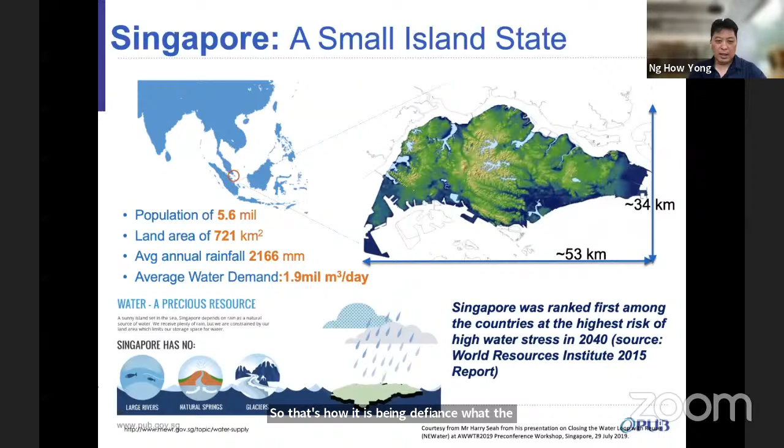So when you say water stress, what does it mean? It means a country receiving less than 1,700 cubic meters per year per person from natural rainfall or rivers. That is how water stress is defined. But nevertheless, Singapore doesn't face the issue of water scarcity.

It has been a long journey, because before Singapore could achieve a sufficient supply of drinking water, if we look at Singapore in the 1960s, we find that Singapore at that time, just before independence in 1965...

You find that the waterways in terms of Singapore River, Kallang River, it was heavily polluted with wastewater and also improper or uncontrolled discharge of sewage into streams and rivers. These rivers and streams became an open sewer system. So with that, you have very polluted water bodies, and that gave a challenge in terms of using river water as a source of drinking water.

Now, during that time, we also saw very frequent seasonal floods due to areas where, especially in the downtown area or Chinatown area, it is low-lying, and that flood occurrence intensified when the rain coincided with high tides. So seasonal flood was one of the major challenges.

Now, if you ask me, do we still face flash floods nowadays? I would say once in a while we did encounter that, and we can attribute that to blockage of waterways, which eventually can be resolved. I'll talk a bit more about how Singapore can go about solving these low-lying area flooding issues.

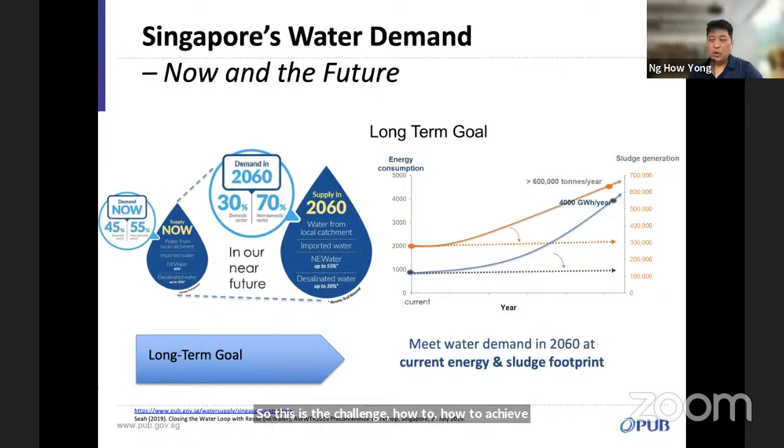However, the cost today is not low. Because if you want to produce biochar, there's an energy input required, right? And if you want to add it into concrete, there's incineration involved. The heat is required for all these treatments. So this is the challenge: how to achieve a low cost reuse of this sludge.

So if you look at Singapore's strategy, how do we achieve water sustainability or water self-sufficiency? The idea is to capture every drop of water. So currently about two-thirds of Singapore's land mass has been converted into catchment area. But of course, there's a limit to how much you can capture because of the limited land space.

Now, the other approach is to reuse water endlessly - this is talking about NEWater, all right? And then the third option is to desalinate seawater. So Singapore today has a diverse supply from 4 different sources.

Right now you can see in this diagram we have only 3 sources. The 4th source is water supply from Johor Bahru, Malaysia. Singapore has a contract with Malaysia which will expire by 2061. So by then, if the contract cannot be renewed, Singapore has to depend on these 3 strategies to achieve self-sufficiency in terms of water supply.

Now, if you ask me, can we achieve that? Certainly yes, because desalination can be done, but the only issue is that it comes at a cost. Right now, seawater desalination energy consumption is about 3 to 5 kilowatt-hours per cubic meter. This is, I would say, rather high compared to fresh water from the river or from groundwater.

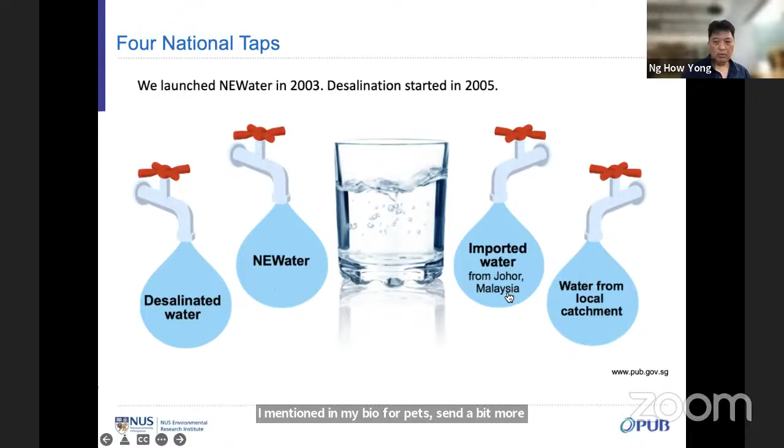So right now in Singapore, if you turn on the tap water, about 40% of the water is from recycled water. The other route is from the sea, through desalination, as a source of fresh water. Singapore has 4 taps: desalinated water, NEWater, imported water from Johor, and water from local catchment. Singapore's catchment has this type.

If you look at Singapore's central region, where the MacRitchie Reservoir area is, that's forested area. So these are the only protected catchments. The rest are considered urban catchment. Marina Reservoir is the first reservoir in the city collecting rainwater from a highly urbanized catchment.

Singapore gets substantial amounts of water from Johor, Malaysia, and there were 2 contracts. One already expired in 2011, so the second contract runs until 2061. In 2011, there was one waterworks handed over from Singapore to Malaysia.

Water reuse is a very important aspect for Singapore as an alternative source, so to do water reuse, the collection system is crucial. Singapore collects its wastewater through 2 deep tunnels. The first is DTSS, which stands for Deep Tunnel Sewerage System.

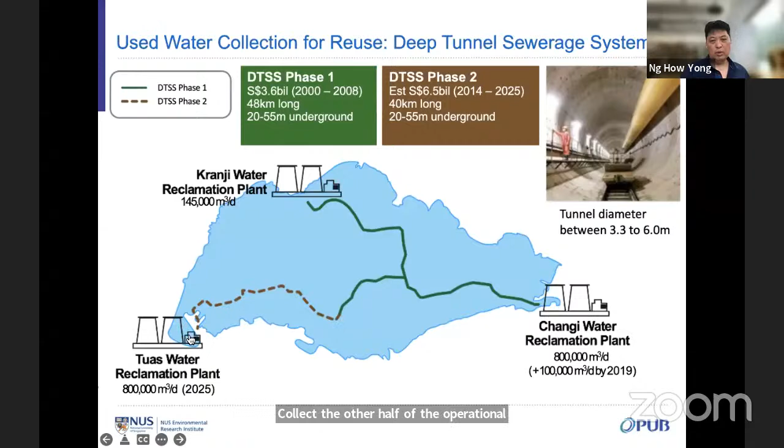After that, normally most plants use the activated sludge process, comprising the aeration tank plus secondary clarification. Right now in Singapore, progressively most plants have been converted to membrane bioreactor. Basically, membrane bioreactor comprises an aeration tank and a membrane, either ultrafiltration or microfiltration, to replace the secondary clarifier for solid and water separation. In the next part of the lecture, I will go through the details—what it is about, and the advantages plus disadvantages.

Singapore's Deep Tunnel Sewerage System, DTSS, was a vision conceived in the 1990s. It was designed to provide a cost-effective and sustainable solution to support Singapore's long-term needs for used water collection, treatment, reclamation, and disposal.

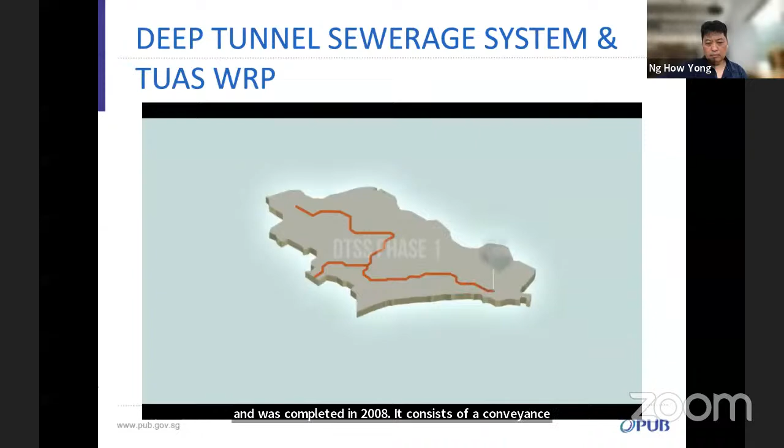DTSS Phase 1 serves the eastern part of Singapore and was completed in 2008. It consists of a conveyance system made up of deep tunnels and link sewers, the Changi Water Reclamation Plant, and its outfall. Phase 2 will extend this deep tunnel system to the southern and western parts of Singapore.

It will have a conveyance system made up of link sewers and deep tunnels comprising a south tunnel and an industrial tunnel, as well as the Tuas Water Reclamation Plant, known as Tuas WRP. By interlinking with Phase 1, DTSS Phase 2 will complete the used water system to serve Singapore for the long term. Kranji WRP remains to the north as part of the 3-node used water system.

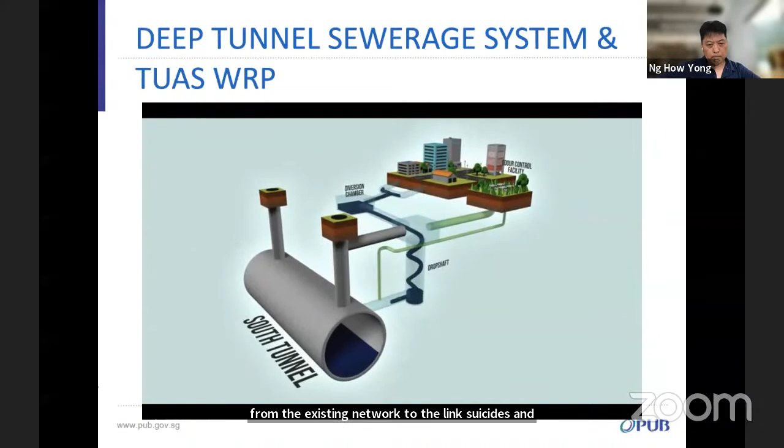How does the process work? Used water will be channeled from the existing network to the link sewers and into the south tunnel via drop shafts. The used water then flows by gravity along the south tunnel, which runs underneath major roads. It is then conveyed to Tuas WRP for treatment.

There, advanced treatment technologies will purify it into NEWater and industrial-grade water for reuse. The integrated NEWater production facility at the Tuas WRP will boost NEWater supply. Any excess treated effluent will be discharged into the sea in an environmentally responsible manner.

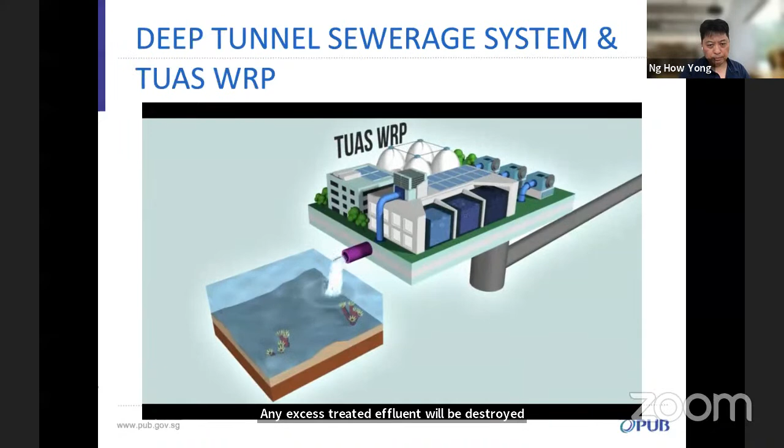The South Tunnel serves as a cost-effective superhighway. Built at a gentle gradient, used water is transported entirely by the force of gravity before being pumped up at Tuas WRP.

This removes the need for multiple intermediate pumping stations, eliminating the risk of used water overflows. Previously occupied land can then be freed up for higher value developments.

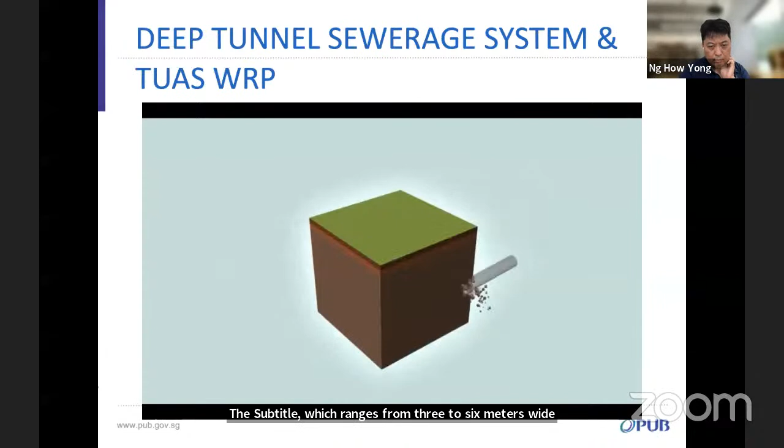The South Tunnel, which ranges from 3 to 6 meters wide, will mainly run along the Ayer Rajah Expressway. Constructed with tunnel boring machines, the South Tunnel lies deeper than some of the underground subway lines and even crosses beneath the seabed at Tuas Bay before reaching Tuas WRP.

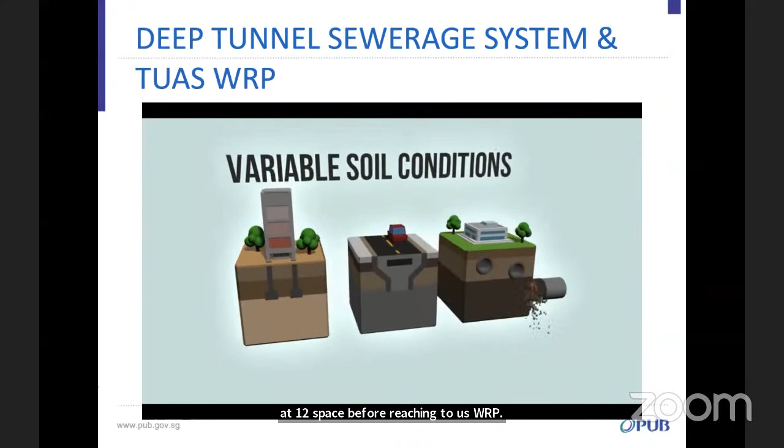One construction challenge lies with the variable soil conditions and existing facilities. The conveyance system will cross under existing tunnels and pass through sedimentary rock with weathered water course channels and soil containing sand pockets. Construction will be carried out with minimal impact. The Phase 2 conveyance system will also feature a complementary secondary liner with HDPE lining to protect against corrosion.

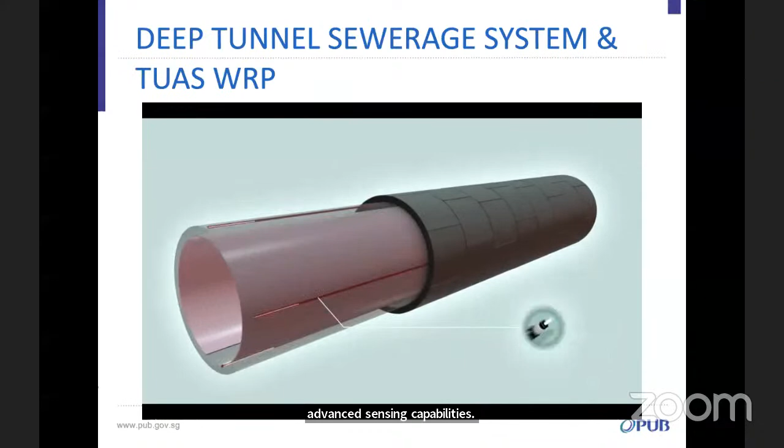One of the key features of the South Tunnel is its advanced sensing capabilities. Embedded on the primary lining, fiber optic wires are installed along the entire length of the tunnel. This monitoring system checks the structural integrity of the tunnel without the need for physical inspection. The fiber optic wires also allow engineers to pinpoint the section that requires isolation for human access in the event of repairs and emergencies. Used water will then flow through the tunnel uninterrupted via an alternative path.

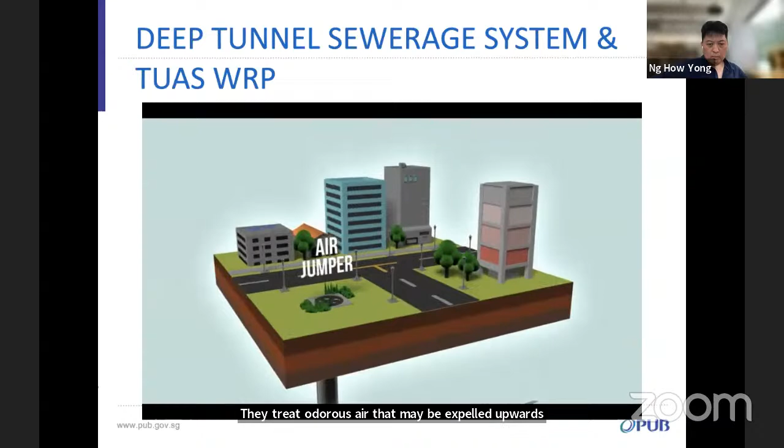The conveyance system also features air jumpers and odor control facilities located strategically at shafts along the South Tunnel. They treat odorous air that may be expelled upwards. Air jumpers act as forced ventilation, designed to push odorous air back down into the tunnel to be treated by downstream odor control facilities.

When the Tuas WRP is operational, existing Ulu Pandan and Jurong WRPs will be phased out, freeing up land for higher value development. In addition, advanced technologies at the Tuas WRP will improve its energy efficiency and reduce cost and manpower.

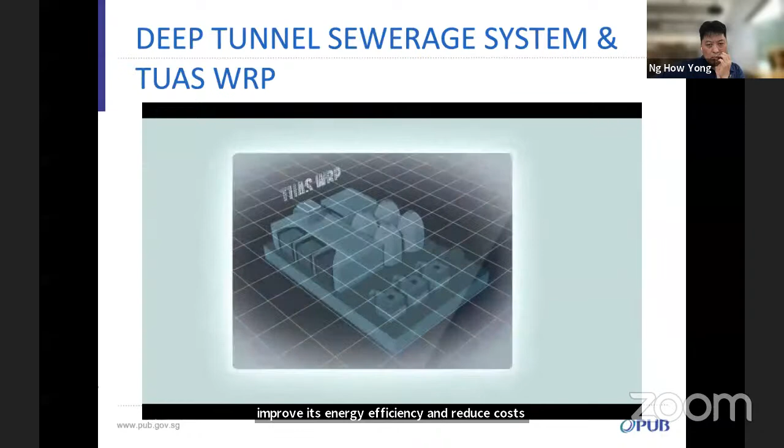The Tuas WRP design promotes energy efficiency. By building upwards, it has a more compact land footprint as compared to conventional WRPs and allows for natural ventilation and lighting, as well as easier access for maintenance.

One advanced technology is the membrane bioreactor process, which replaces the conventional bioreactor, secondary sedimentation, and microfiltration and ultrafiltration stages, thus streamlining the used water treatment and new water processes into one.

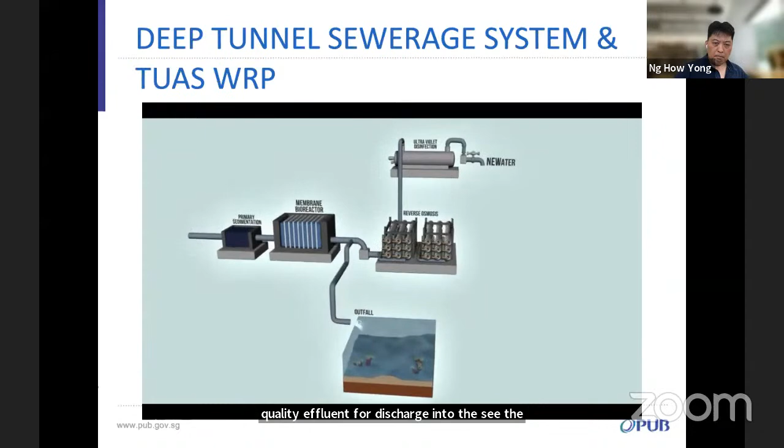This provides space savings while generating a higher quality effluent for discharge into the sea. The plant will be the largest membrane bioreactor facility in the world, treating 800,000 cubic meters of used water per day. Another technology implemented at Tuas WRP is the thermal hydrolysis process, which will reduce the space required for biosolids treatment and increase biogas and energy yields.

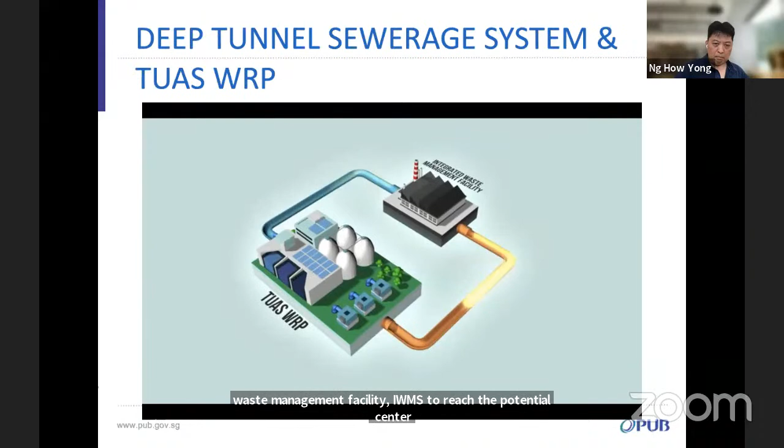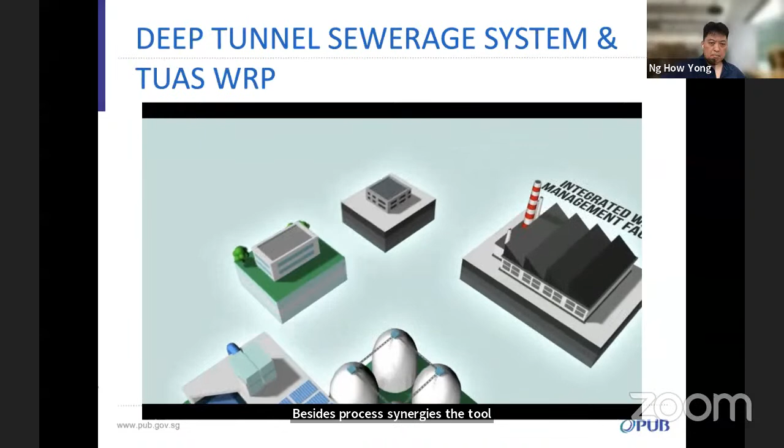Tuas WRP will be co-located with the National Environment Agency's Integrated Waste Management Facility, IWMF, to reap the potential synergies of the water-energy-waste nexus, maximizing energy and resource recovery. For example, food waste received at IWMF will be pre-sorted and digested with sludge using Tuas WRP's digesters, producing biogas. The resulting biogas and sludge are fed back as a fuel source to IWMF for incineration. Electricity generated at IWMF is then supplied to Tuas WRP for its operations. Besides process synergies, the two will share common facilities like the admin building and car park to further optimize land use. The co-located facility is compact, resource efficient, and the first of its kind in the world, planned from the ground up.

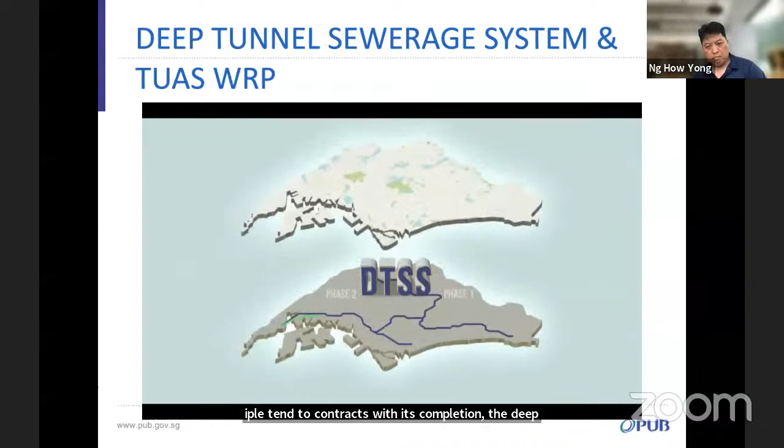DTSS Phase 2 is envisioned to be sustainable, resilient, and cost-efficient. To be ready by 2025, it will be completed in stages through multiple tender contracts. With its completion, the deep tunnel sewerage system will play an integral role in Singapore's diversified water portfolio, creating a sustainable used water management system for our country's future.

Okay, so just now the video introduced you to DTSS Phase 2 and also the upcoming Tuas Water Reclamation Plant co-located with the Integrated Waste Management Facility, IWMF. So coming to NEWater, as I mentioned earlier, after the used water is treated, it goes through microfiltration or ultrafiltration before going through the reverse osmosis process, followed by ultraviolet disinfection to produce this high-grade reclaimed water.

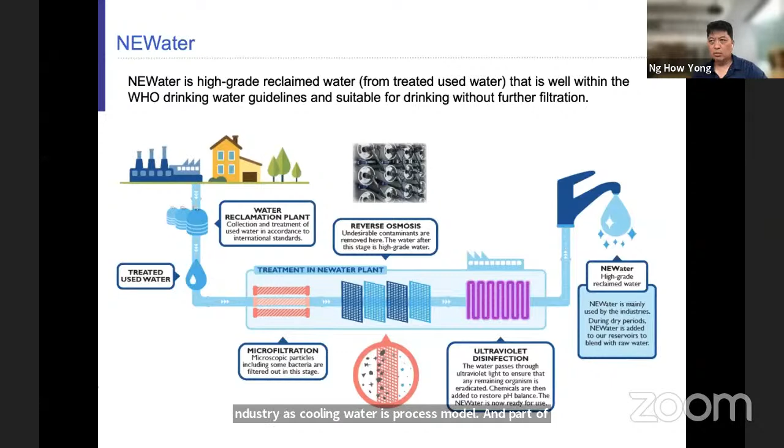So in Singapore this is known as NEWater, which is high-grade reclaimed water. As mentioned earlier, NEWater is primarily used by industry as cooling water and process water, and part of it is added to Singapore's 17 reservoirs to blend with the raw water as a source of drinking water. This is called direct non-potable, indirect potable use. So NEWater plants right now in Singapore include Kranji, Bedok, Changi, and Ulu Pandan, and in the future there will be the Tuas NEWater plant as well.

Now, one of the key questions that a lot of people ask is: is this NEWater safe for drinking? Because you look at NEWater, it's recycled water from wastewater that goes through microfiltration, ultrafiltration, reverse osmosis, and then ultraviolet disinfection. So the challenge here is whether it's safe for drinking.

So the key is learning from what other countries have done. Singapore has done demonstration plant studies, we have a very comprehensive sampling and monitoring program, and in earlier studies we also had health effect studies. If you look at recycled water and what other countries have done, the first country that implemented water reuse quite extensively was the US, in Southern California, in the LA and San Diego area.

At that time, there was this called Water Factory 21. Basically they went through the same process, but the water was used to recharge the groundwater, supplementing it, and at the same time creating a seawater barrier. You must make sure the groundwater is at an ample supply, otherwise seawater intrusion will occur, and your groundwater will become salty or brackish, because if your water uptake from the ground is too high relative to freshwater supplementation, you get seawater intrusion.

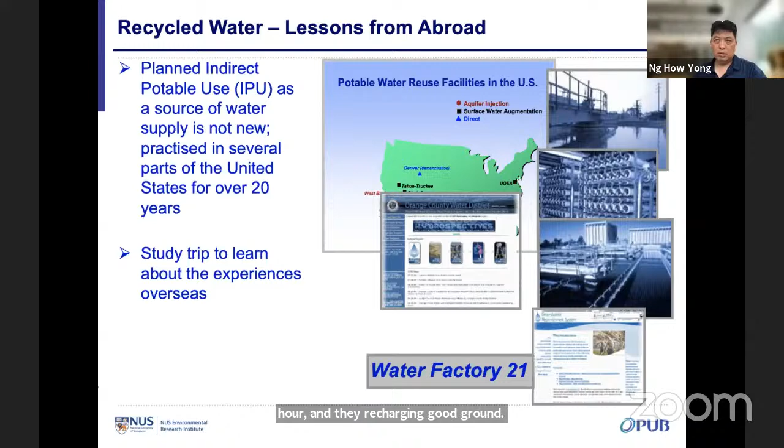So in the early days, the 1970s, there was this Water Factory 21. They went through the same reverse osmosis process, produced this high-quality water, and recharged it into the ground as a groundwater supplement. So that has been done a long time ago, and certainly it has been proven to be working.

And then in Singapore, before we started NEWater in the early 2000s, there was an extensive study, including a demonstration plant, to first produce enough water for laboratory-scale study on the health impact, and at the same time to gain operational experience. That NEWater demonstration plant ran from 2000 to 2013, with a capacity of about 10,000 cubic meters per day, which is quite sizable.

So we'll test for reliability and robustness, and gain experience through the demo, so that you can incorporate problems encountered into the design of the full-scale plant, and help address concerns like damage to the membrane by hypochlorite, for example.

In terms of sampling and monitoring, until today the Public Utilities Board conducted regular extensive monitoring, including 293 water quality parameters, more than 100 specified by US EPA and 122 by WHO. During this study, we conducted the most comprehensive water quality study of reclaimed water, covering classical water quality parameters, and additionally looking at synthetic and natural hormones, which we call emerging contaminants, or EDC, endocrine disrupting compounds. This was studied extensively, along with microbiological water quality parameters.

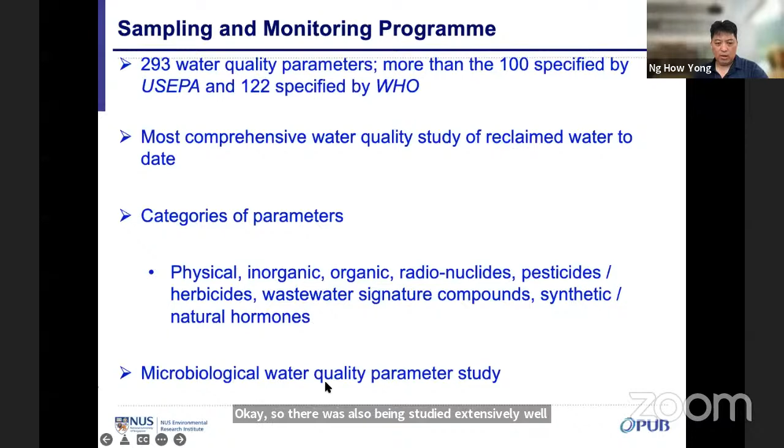So these are all the various categories of test parameters, and eventually there are 293. You can see the emerging contaminants category alone considers 49 parameters. So in total, 293 parameters are monitored consistently, including during the studies.

Of course, there are important practices like good laboratory practices, quality assurance, and quality control, to make sure you have updated, effective, and ethical protocols, and good quality accurate data for analysis, training, and troubleshooting. To date, more than 170,000 tests have been conducted on samples from treated used water and NEWater, which consistently meets the latest requirements of US EPA's National Primary and Secondary Drinking Water Standards and the WHO Drinking Water Quality Guidelines.

I mentioned earlier that in the early 2000s there was a 5-year study looking at health impact. In this study, mice and fish were studied for short-term and long-term health effects, looking at long-term toxicity and carcinogenicity. Based on that study, it was proven that NEWater indeed was very safe as a source of drinking water.

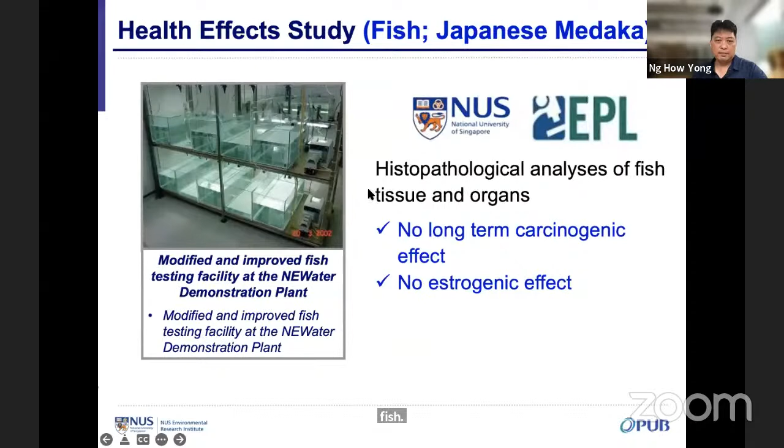So I mentioned desalination is another important source of drinking water. Right now Singapore has 5 desalination plants: SingSpring desal plant at 30 million gallons of water per day, then the Tuaspring plant, and a third one, the Tuas desal plant, also 30 million, which was completed end of 2017.

Now I want to highlight this 4th plant, the Marina East plant. It's located right beside Marina Bay. This plant is very interesting in the sense that it was designed to treat 2 types of water - one is regular seawater.

Now, just like I mentioned, how do you ensure the fresh water from Marina Bay is safe for drinking? To achieve that, the Marina Bay water is actually treated by the Marina East desal plant. So this desal plant serves either taking seawater for treatment, or fresh water from Marina Bay, which goes through the reverse osmosis process to produce high quality RO water. So this is the treatment protocol to ensure that this Marina Bay water is safe - basically, it's RO treated water.

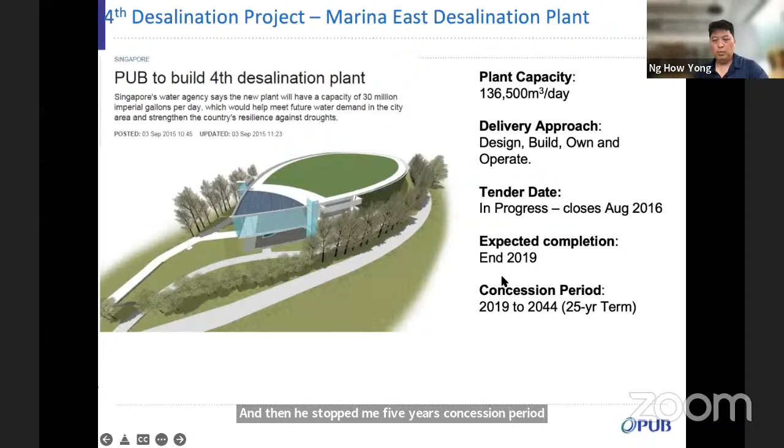So they run the plant and sell the water to PUB. In terms of ensuring water sustainability, we need to ensure there's sufficient water supply, so I would call that the hardware. But eventually you still need the human aspect of it too, conservation and valuing water, enjoying water, is a very important part of the whole equation.

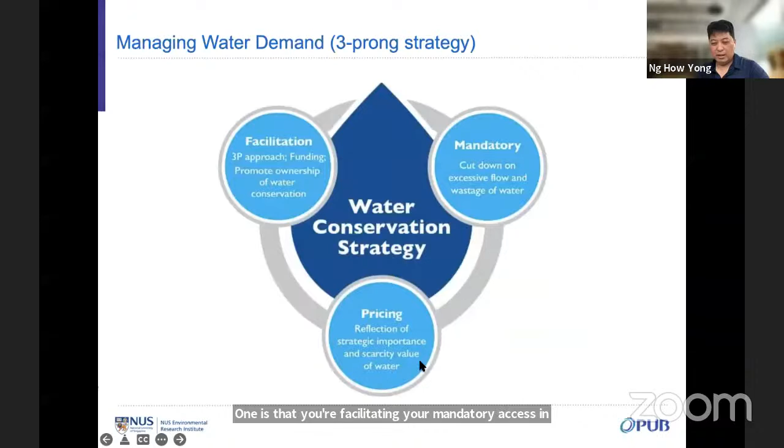So you need the people of Singapore to cherish water so that they don't waste it. To achieve that, you need the 3-prong strategy. One is you facilitate, making it mandatory to cut down excessive flow and wastage of water. And a certain important aspect is the pricing.

In terms of mandatory requirements, there's a standard for how much water a tap or washing machine can use, and there's this water efficiency labeling scheme. All electronic utensils, taps, sinks, or shower heads related to water have this water efficiency label. A 4-tick rating is the most efficient. This gives the consumer a choice.

Usually consumers want something that will save their water bill. So basically there are 17 reservoirs in Singapore, and there's this Active, Beautiful, Clean Waters program to convert all these concrete canals into beautiful waterways, so that people appreciate and enjoy the nice environment.

Now, in terms of consumption, as I mentioned earlier, Singapore is trying to reduce and encourage water consumption reduction. In 2017, it was 143 liters per person per day of water consumption, and right now it's hovering around these numbers.

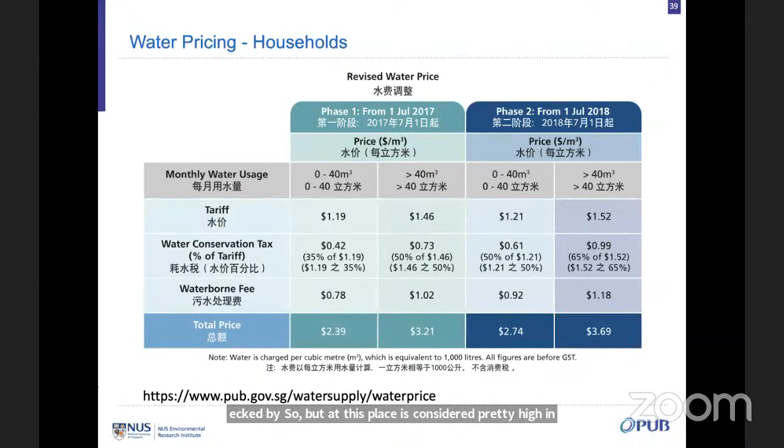So is this considered high? I would say it is high in Asia. Of course, for Europe and the US I haven't checked the price, but this price is considered pretty high in Asia, certainly. By having such a high cost, it hurts the pocket if you waste water, so for Singaporeans, including myself, we are very careful.

Like sometimes you forget to turn off the tap, kids forget to turn it off, and when the kid gets older they'll get a big scolding because more money is going down the drain. So water pricing is a very important aspect, but of course it's also a very sensitive topic politically.

If you look at other countries, including Taiwan, the water price is very cheap, about $1 Singapore per cubic meter. That is very low. When you talk to friends in Taiwan, they say politicians refuse to increase water price because if you raise it, people get unhappy and you'll lose the election. So politicians are reluctant to increase water price.

So the water treatment plant faces a big challenge because the price is so low, and they have to find very cost-effective means of water treatment.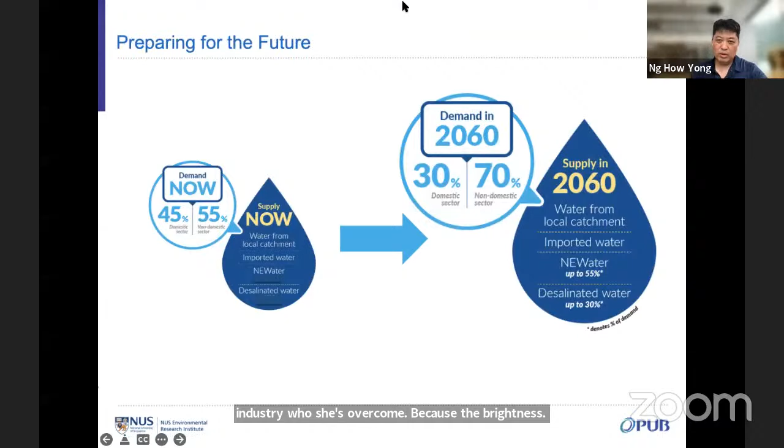Now there's this thing called industrial water in Singapore. What is industrial water? It's basically MBR permeate water, at a lower cost of $1.58. Industrial water is used by certain industries, like shipyards, when they wash a ship hull or the body, they don't need very pure tap water, so they can switch to industrial water for cleaning purposes.

So in Singapore, there are three types of water: tap water, NEWater, and industrial water.

Moving forward to the future, Singapore has to increase its water supply by at least one time of today. So how do we achieve that? Of course, building more desal plants is the future, but at the same time, you need to reduce production costs, improve quality and security. So what are the solutions?

R&D looks at biomimetic desalination, low energy desalination, cryptosporidium detection to safeguard drinking water, and fish monitoring systems to make sure the water is safe. So I think for those of us who are very familiar with water treatment...

If you go to a water treatment plant, at the last part of the treatment, before the water goes out to your water storage, there's always a fish tank with fish swimming. You'll be wondering what this fish is for. They use the fish as an indicator of problems with the produced drinking water. If there's a toxic compound inside, the fish will die. So if you see fish dying, you know the water has a problem - you're using fish to monitor drinking water safety.

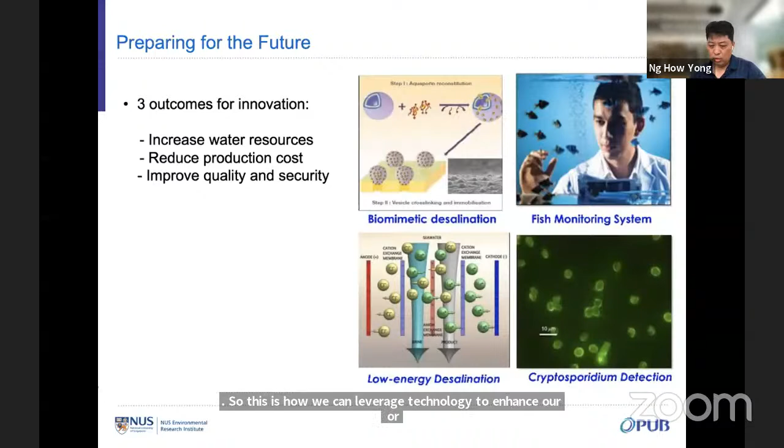Remember that in Singapore, our wastewater is our source of NEWater. So how do we ensure there's no toxic compound or illegal discharge into the wastewater? There's this environment sense startup company that developed an electrochemical sensor, a bioelectrochemical sensor, that detects wastewater effluent discharge to check for toxic compounds. If a toxic compound is detected, it triggers the auto sampler to collect the sample, which can then be taken for ICP analysis for heavy metals to confirm and check what compound is found in the illegal or accidental discharge.

This system was implemented in Singapore about two years ago. Right now there are 175 units installed around Singapore, mainly detecting trade effluent from factories that use heavy metals like electroplating. Over two years, they've captured about 30-plus samples of discharge exceeding the limit, and those were subjected to legal prosecution. So this is another way you leverage technology to safeguard your source of drinking water.

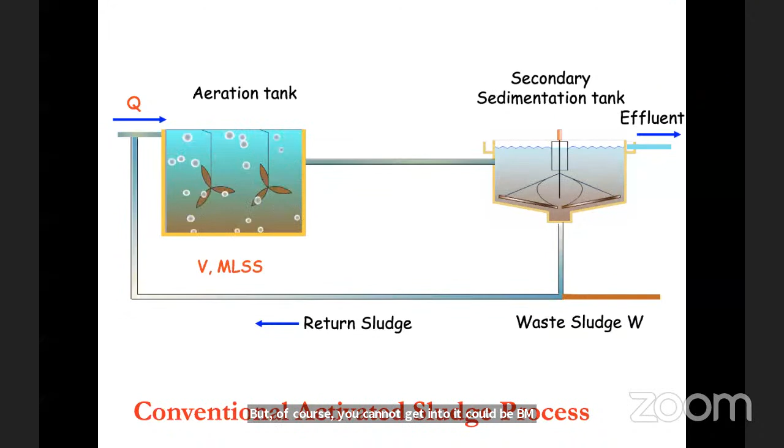With that, you go through a secondary sedimentation tank where you achieve solid-liquid separation by gravity, producing an effluent that is low in suspended solids or bacteria. But of course you cannot get zero—you still get a few ppm, at least, of TSS, and those are usually bacteria. After sedimentation, you recycle the bacteria back to the aeration tank. Then, because of the excess growth or net growth of bacteria, you take out the excess sludge as waste sludge. So this is the conventional activated sludge process.

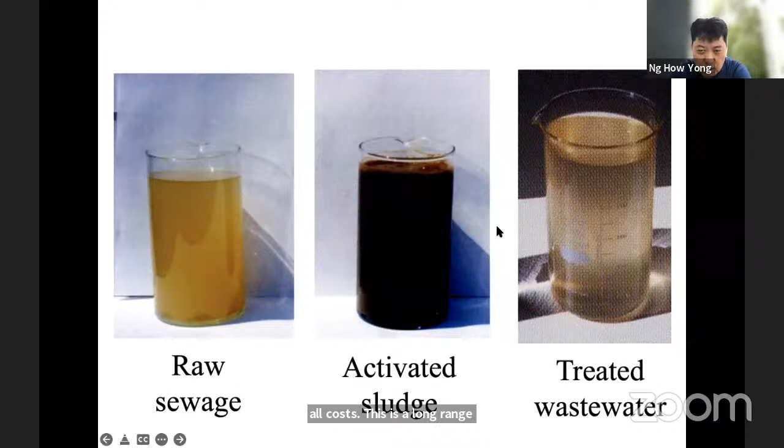Now this is a picture of a typical activated sludge process. You can see this aerator, which has a propeller splashing the water as a means of transferring oxygen into the wastewater. This is the aerator for aeration, and then you have the secondary clarifier, which is typical of the conventional activated sludge process. This is a picture showing raw sewage, activated sludge, and then treated wastewater—the typical activated sludge process.

Now, is there anything wrong with the activated sludge process? I would say there is nothing wrong. But if we compare it, what are the major challenges of the activated sludge process? First is a large footprint. I'm not saying that activated sludge process is the only way to have a good treatment process.

Of course, if you talk about rural areas, you've got oxidation ponds, you've got wetlands. There are different types of systems suitable for different types of communities and wastewater flows. But if you talk about activated sludge process, especially in a very organized, big city where there is a huge volume of wastewater, you don't have a lot of land—you can't afford to have oxidation ponds, for example in Jakarta, that would be too challenging. In big cities where population intensity is very high, we need a high rate, high efficiency, low footprint wastewater treatment system. Classically, that's the activated sludge process.

When you compare activated sludge process to, let's say, membrane bioreactor, activated sludge process will require a larger footprint. But of course, an oxidation pond would be even larger. A 2 or 3 stage process is very typical—even MBR still needs a 2 or 3 stage process depending on treatment objectives. But one of the key challenges is the settling problem of activated sludge.

We hear about this thing called bulking and foaming. That is when you have filamentous bacteria overgrow, and then these bacteria cannot settle. Normally, an activated sludge failure is when these bacteria fail to settle in the secondary sedimentation tank. Then you have all this waste bacteria lost in the effluent, and you cannot have sufficient bacteria or microorganisms to cycle back to the aeration tank. Then your system will slowly fail because you're losing your bacteria. So having a very well settled bacteria or biological floc

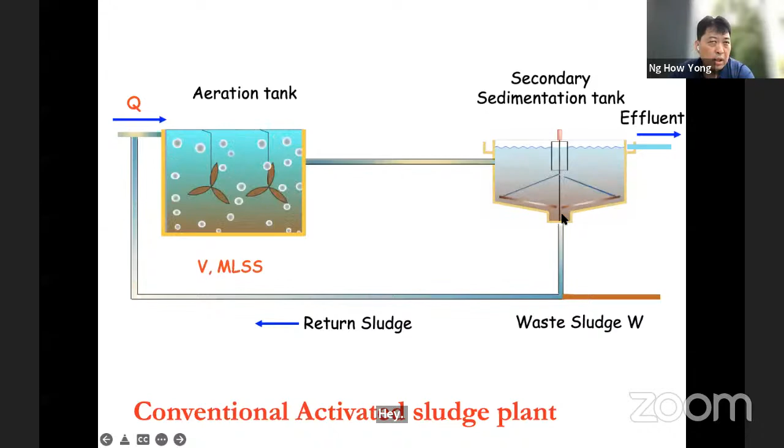biomass is very crucial to the successful operation of the activated sludge process. So when you have a bulking or foaming issue, that is a sign of trouble for your treatment, the activated sludge process. So for aeration, certainly you need an efficient aeration system with fine bubbles to have a high oxygen transfer efficiency.

Then you can have high dissolved oxygen in order to reduce energy cost, obviously, right? Normally the activated sludge process may need further polishing, such as disinfection or even filtration. It all depends on your target usage. But most wastewater treatment plants at least need disinfection before you discharge to the receiving water body. Then you may have a relatively dilute sludge generated. That's talking about activated sludge process.

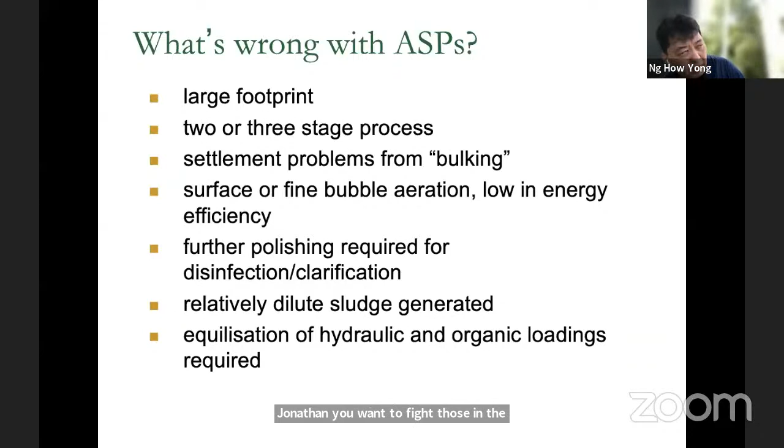If you study activated sludge process, typical biomass concentration or MLSS is about 3,000 plus, maximum 5,000. Seldom do you go above 5,000, right? More than 5,000 means your oxygen transfer, sludge settling may be a problem. So normally activated sludge process will maintain the MLSS concentration less than 5,000, right?

So in a sense it is diluted compared to MBR, because MBR can go up to 13 grams per liter of biomass concentration - 13,000 milligrams per liter of MLSS.

Equalization of hydraulic and organic loading is required - it depends. If it's industrial, then certainly you need that. Otherwise, for domestic, normally you don't need equalization. This is the conventional activated sludge process, right? You have a bioreactor, you have a settler, and you have a recycling stream, that's the sludge.

Of course, key control parameters include F to M ratio, food to microorganism ratio. There's always a range that you should maintain, otherwise you may have food starvation or overloading. If your F to M ratio is too low, you may have sludge bulking issues. And then, of course, you can compute your sludge age.

Typically for conventional activated sludge, your maximum sludge age is like what - 10 days, 12 days is considered pretty high. That's typical. But for MBR, you can go up to 15, 20 days of sludge age.

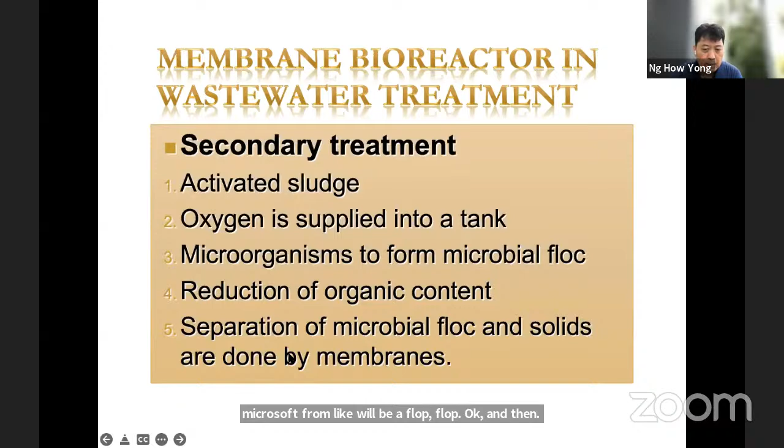Now, if you ask me, what is the MBR characteristic? So basically, we replace the secondary clarifier by MF or UF to achieve more reliable solid-water separation than activated sludge. Because if you have an activated sludge process, usually the discharge quality is controlled by SS, BOD, or COD. Now if your settler doesn't work well, you get more solids coming out. When you do a BOD or COD test, the value will be higher because your biomass contributes to organics, and then you may exceed your discharge standards. So settling is very crucial.

Now, if you have a membrane to replace the settler, the membrane, no matter how it runs, will retain all your bacteria. So you will only produce a permeate or effluent that is suspended solids free. You only have dissolved organics. So you will be able to ensure a reliable water quality that always meets the discharge standard, unless your bacteria died or your bacteria is not working. So you can produce an effluent of much higher quality than the conventional activated sludge process.

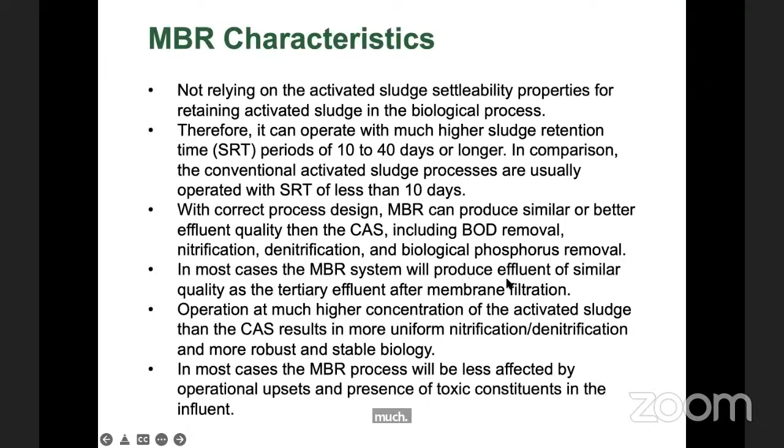With correct process design, MBR can produce similar or better effluent quality than activated sludge, including BOD removal, nitrification, denitrification, and biological phosphorus removal. In most cases, the MBR system will produce effluent similar in quality to tertiary effluent after membrane filtration. Operation at much higher concentration of activated sludge than conventional activated sludge process results in more uniform denitrification and more robust, stable biology. In most cases, MBR process will be less affected by operational upsets and presence of toxic constituents in the influent, because you have such high biomass concentration in the aeration tank.

So if you compare the quality: conventional activated sludge BOD is 5 to 7 milligrams per liter, MBR typically less than 0.4. TSS less than 0.4, while activated sludge is 2 to 5. Ammonia less than 0.5, total nitrogen less than 5, TP less than 0.2. So MBR normally will produce much better effluent quality compared to the activated sludge process.

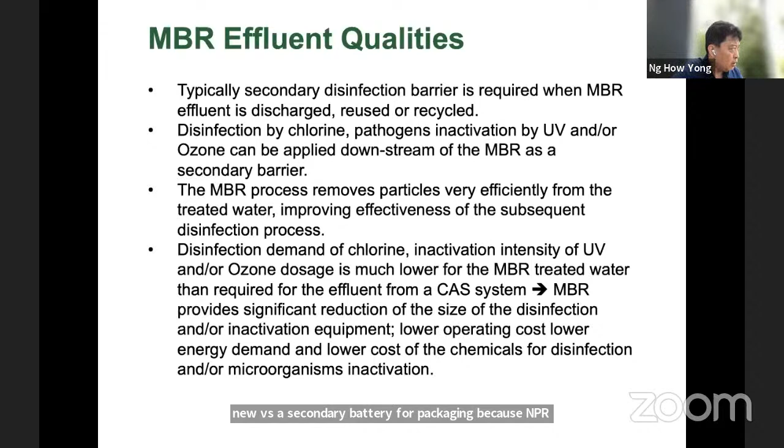Typically, a secondary disinfection barrier is required when MBR effluent is reused or recycled. You can disinfect by chlorine, UV or ozone as a secondary barrier for pathogens, because MBR can remove particles, but it cannot guarantee absolute virus removal. So you still need a secondary barrier by disinfection. Also, you cannot guarantee you don't have a broken fiber in the MBR through long-term operation, so it is always advisable to have a secondary barrier of disinfection.

MBR process removes particles very efficiently from treated water, improving the effectiveness of the subsequent disinfection process. If you have UV and you've got solids, it's not as effective compared to having totally suspended-solids-free water, because in ultraviolet disinfection, if you've got particles, you've got viruses hiding behind the particles. If they're not subjected to UV irradiation, then the efficiency of disinfection will drop.

Disinfection demand of chlorine, and inactivation intensity of UV and ozone, is much lower for MBR-treated water than required for effluent from the activated sludge system. This means MBR can provide significant reduction in the size of disinfection or inactivation equipment, lower OPEX costs due to lower energy demand, and lower cost of chemicals for disinfection or microorganism inactivation.

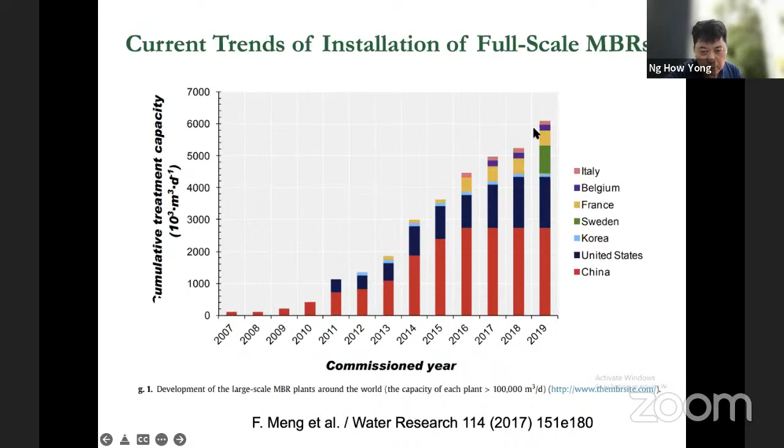There are basically two configurations of MBR. One is the side-stream MBR, where you have your aeration tank, then use a pump to pump through a membrane module, and your recycled sludge goes back to the bioreactor. Under this kind of system, it's a pressurized system—you apply pressure to push the water through either the MF or UF membrane to produce permeate. So this is a pressurized system for side-stream MBR.

The other commonly used system is the submerged system. Basically, you submerge your membrane into the bioreactor, and then provide a suction pressure to suck out the water through the membrane. Just imagine you're having a straw—when you use a straw, you need to provide suction. You use a suction force to suck out the water, so this is very similar to that concept.

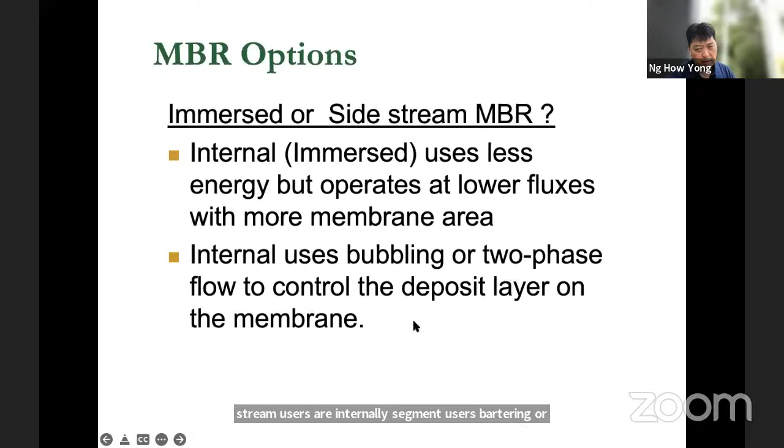You also have bubbles scouring the surface to produce intense recirculation and delay flow. That's how the system works - you submerge the membrane, there's an air jet at the bottom, bubbles rise, providing scouring effect to the membrane surface. So the question is, immersed or side stream MBR, which is better? Based on many reports, submerged or immersed systems use less energy but operate at lower flux with more membrane surface area. So there's always pros and cons - internal uses bubbling or two-phase flow to control the deposit layer.

This is an example comparing external membrane and immersed systems in terms of surface area and flux. Typically MBR maximum sustainable operation flux is 25, although some report 20 to 50, but in reality 25 is the maximum for sustainable operation - normal operation at 25 LMH. But side stream can go higher, with pressure at 400 kPa. For immersed systems, it's negative pressure, 20 to 50 kPa.

Cross flow velocity is 3 to 5 for side stream systems, but immersed systems don't require that. Instead, immersed systems need an airflow rate of about 40 cubic meters per hour for a ZW 500 module. Energy consumption is 4 to 12 kilowatt hours per cubic meter of product water for side stream, versus 0.3 to 0.6 kilowatt hours per cubic meter for submerged. So energy-wise, it's much lower for the submerged system.

Now, advantages of external membrane modules: aerating the tank floats oil and grease, it's easier to clean the membrane chemically without upsetting the biological process, and there's ability to control the environment around the membrane module better. Flexible operation, delta P may be changed to accommodate the inflow rate. So this is for external membrane modules, especially the last two points. For the third point, cleaning the membrane chemically without upsetting the biological process, that is true if you have a single tank system.

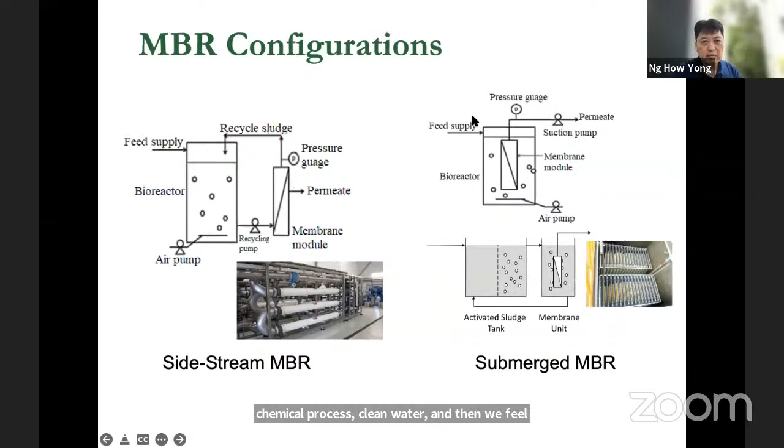So there's always pros and cons to those systems. Now, advantages of submerged membrane: less pumping cost and lower energy cost. Membrane installed in the existing tank, you can always put it into the activated sludge tank. So for submerged membrane systems, you can retrofit from the activated sludge process, just shut off the secondary clarification and convert some of the final tank into a membrane tank. Larger modules can be designed for larger flow to be treated, so depending on the flow rate, you can design the membrane module.

In terms of submerged membrane companies, there are many companies out in the market. The more well-established ones include Zenon, US Memcor - this is the earlier name, now it's called DuPont Evoqua, that is the Memcor we're referring to - and then you have the Japanese company Mitsubishi. These are all hollow fiber, like spaghetti type. And then you've got flat plate vertical like Kubota and Toray, these are flat plate and frame systems.

So this is like hollow fiber - what are all these things? This is the hollow fiber membrane. Basically if you look at this fiber, it's just like a straw, there's a hollow tube inside. But the wall of your straw is polymer with micropores, 0.45 or 0.04 micrometer pore size holes, that allow water to permeate through. At the bottom there's a holder, on the top there's a holder, and then you provide suction, and it will produce the permeate.

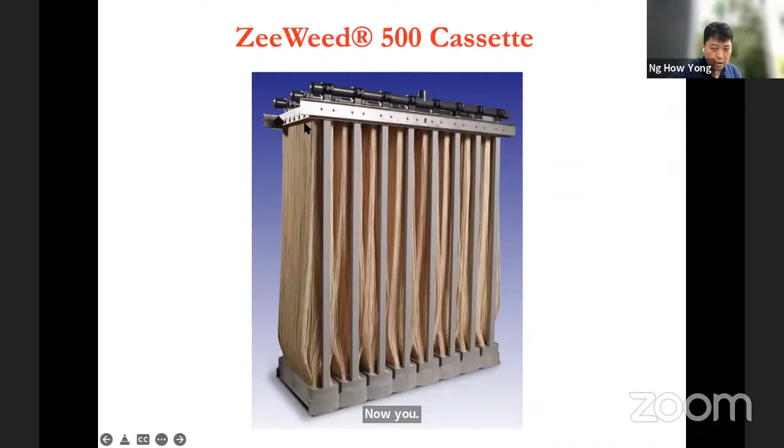So this is a ZeeWeed fiber. We can see that hollow fiber with outside-in means the dirty water is outside, and your water will flow inwards, that's why it's called outside-in. For this, the ZeeWeed is 0.9 millimeter internal diameter, 1.9 mm outer diameter, meaning the wall thickness is about 0.5 mm.

Chlorine resistant polymeric membrane is usually like PVDF material, with pore size in the ultrafiltration range of 0.04 micrometer. Permeate is drawn by suction, and air bubbling induces turbulence to keep the membrane clean. So in this case, you have outside-in hollow fiber, shellless module, open tank system, gentle suction, air scouring providing air at the bottom, and feed and purge at tank level. So these are the systems - membrane scouring, and you can see our membrane system has two types of aeration.

One is for the regular fine bubble for biological oxygen requirement. That is called the typical aeration or diffuser aeration, for biological demand. Then they got this coarse bubbling, we call it scouring. Of course, it's the most significant contribution to running cost of the MBR.

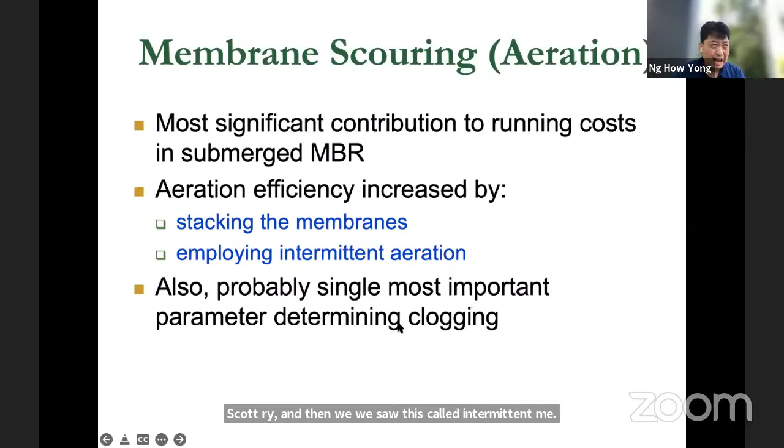Also probably the single most important parameter determining clogging. So this scouring is crucial to delay membrane fouling. When you have scouring, there is basically two-phase scouring - air and water. So you inject air, and this bubble will rise, and then scour and travel along the membrane surface, providing a scouring effect.

This minimizes solid concentration build up in modules, provides uniform distribution in the modules, reduces local solid concentration, and results in energy saving. So normally you can see that as...

This aeration implementation causes all these bubbles to rise up, and then bring along with you the permeate liquid, then you form a circulation movement. This blue color is the permeate that travels inside the hollow fiber.

So the role of the bubble provides surface shear, induces liquid motion, induces fiber movement. You basically shake the membrane.

So I always like to use this classical example. Let's say your clothes is very dusty. How do you shake off the dust? You shake it, with the jet, right? Then your dust will come out. So for the membrane it's the same. How do you create this jet or the shaking?

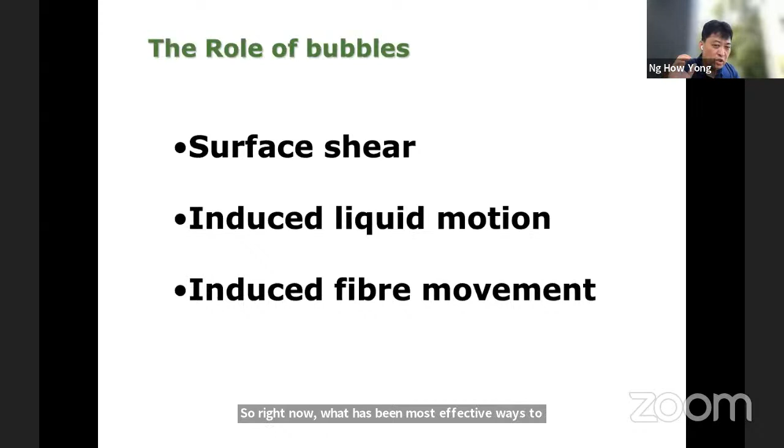You create it by injecting a big burst of bubble. So right now, what has been proven most effective is to create a sudden intermittent big burst of bubble that creates the shocking and vigorous shaking of the fiber. So the current companies like Evoqua, Zenon - now Zenon sold to Suez, okay earlier was sold to GE, now it's Suez GE membrane - they implement intermittent coarse bubble, a sudden release of coarse bubble to induce this vigorous sudden fiber movement.

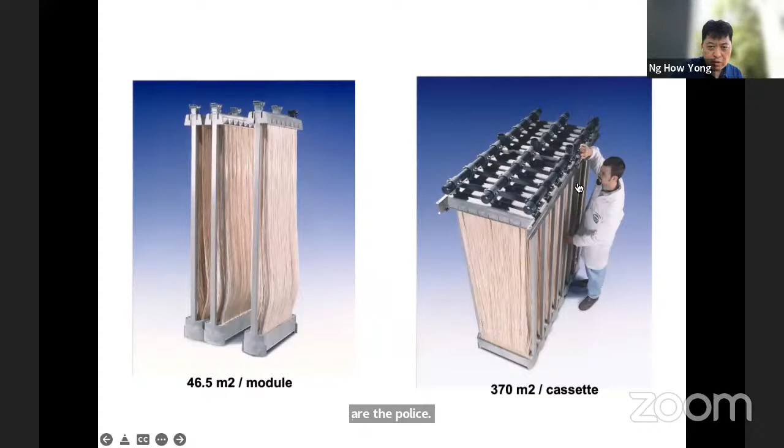So this is an example of this bubbling, and this is how the membrane module looks - each module is about 46.5 meters squared. Per cassette, you join them together to form a cassette of 370 square meters. The overall height is about a human's height length.

You can see that all this membrane will assemble into a cassette, a cartridge, and then you use a lift to lift it and then lower it into the membrane tank.

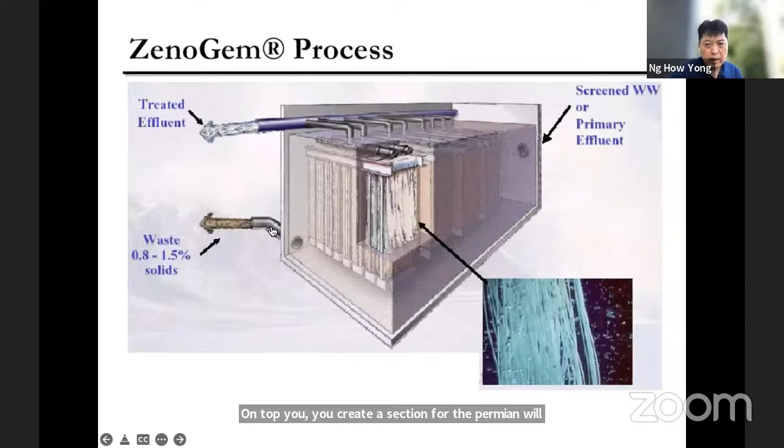And then this is how it looks like. Once you install into the system, on top you create a suction force, the permeate will come out, and then at the bottom is your waste solid that you do for the circulation or wasting.

In filtration mode, suction pump is on for 8 to 13 minutes, air blower on. In resting mode, suction pump off for 2 minutes, air blower on, no back washing required. So this is the earlier continuous bubbling mode. Cleaning mode performed when pressure increases by 0.2 bar, that is approximately every 2 to 3 months.

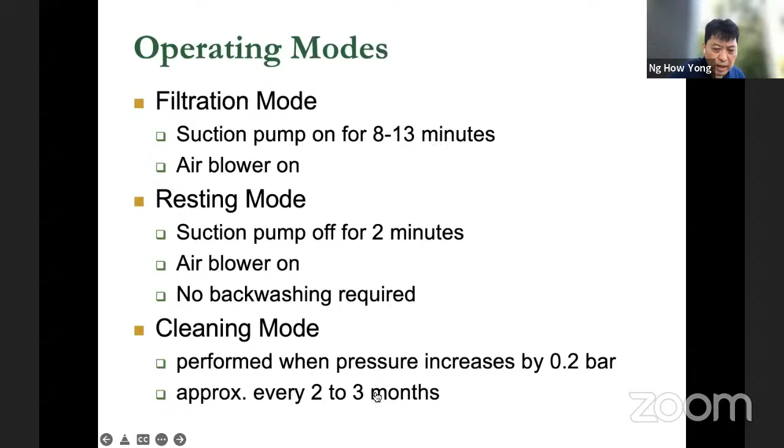And then Kubota is a chlorinated polyethylene material, sheet for a pillow with sponge inside. So you have this sponge inside to create a porous spacer, and that is when you aerate it. The flat sheet aligns vertically, and you have a very good scouring effect.

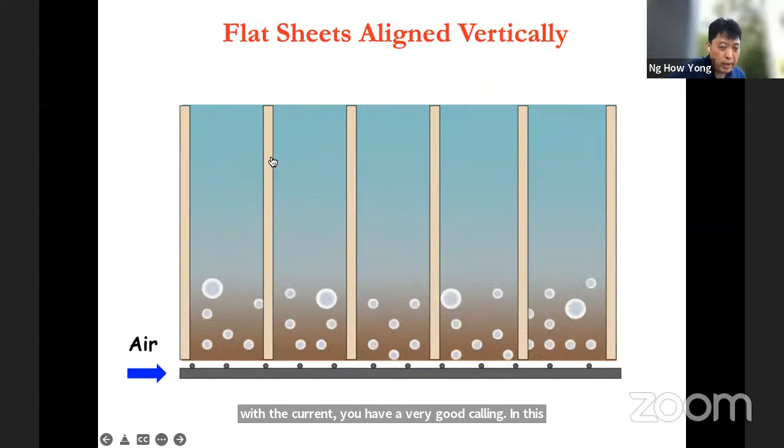In this case, you find that your flat sheet membrane doesn't vibrate, not like the hollow fiber. When you scour the hollow fiber membrane, it will shake. But in a flat sheet system, the flat sheet is rigid, but we provide air scouring to very effectively scour the surface. That is the Kubota system.

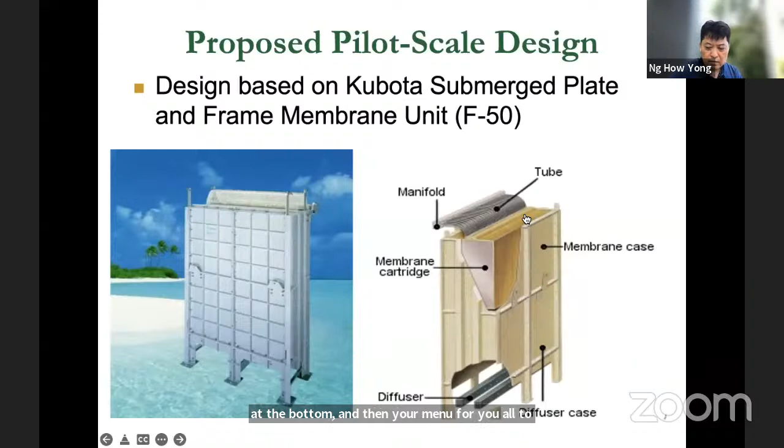That is the membrane cartridge. And then membrane casing. And then you got your diffuser at the bottom, and then your manifold with all the tubing connected to individual plate of membranes.

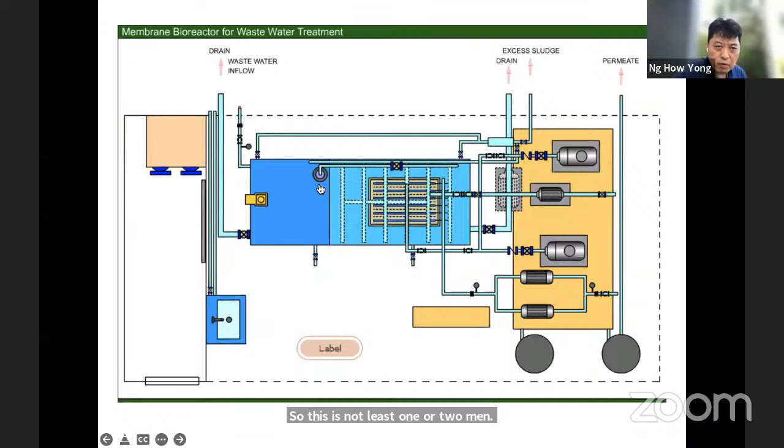So this is your inlet wastewater treatment tank, right? Inflow comes in and then goes through membrane permeation. This is a picture of a small scale system in a container system. You can see that this is your membrane tank with all the flat sheet Kubota membrane.

Now, in terms of the membrane material and the pore size, normally we classify as microfiltration or ultrafiltration. Microfiltration ranges from 0.1 to 1 micrometer versus ultrafiltration is 0.001 to 0.1. So anything less than 0.1, we call that ultrafiltration.

Now, how do you see that? What do you mean by asymmetric kind of membrane structure? So if you look under the SEM, you will see that the membrane has a porous skin, and the bottom layer is a porous structure.

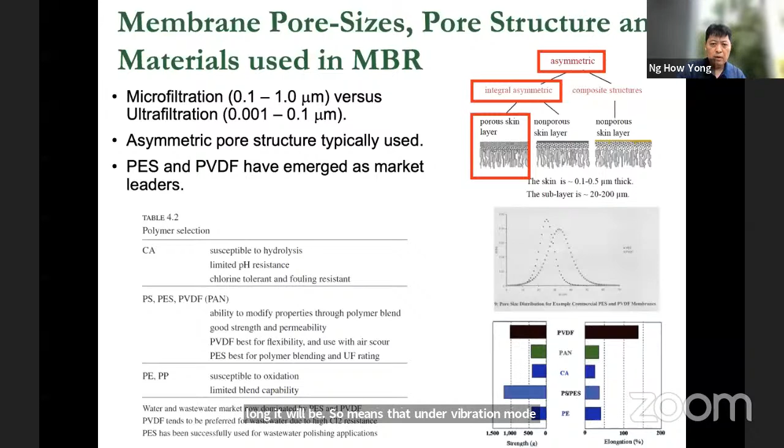Now, in this bottom diagram, it shows the strength versus the elongation. You can have PVDF at very high strength, and PS/PES also has very high strength. But in terms of elongation, the best is PVDF, meaning it has good elasticity. It's not easy to break, you can elongate it. So under vibration mode, it is much more durable for PVDF. All right, so this is the MBR configuration.

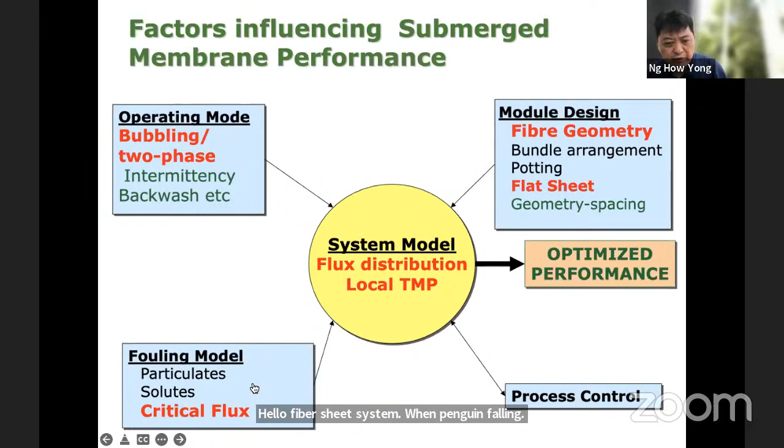Now, how does the membrane influence - what kind of factors cause membrane performance issues? Like I mentioned, the bubbling two-phase is crucial, intermittent backwash. The module design - whether it's hollow fiber, potting, or flat sheet system - will impact on your fouling. And then the fouling model, whether it's particle or solute, the critical flux concept, and then you optimize your performance and process control. So what is membrane fouling?

Membrane fouling means your foulant attaches on the membrane surface. Normally in a wastewater treatment system, you will need to run at a constant capacity, because you cannot say, hey, my treatment capacity dropped. Otherwise what happens to my wastewater that keeps coming in, I need to treat it, right? You don't have a holding tank for it, especially for domestic wastewater. So your capacity is maintained constant.

So what happens is that TMP - as your membrane filtration time increases, your membrane will foul. When your membrane fouls, in order to have the same capacity of permeate flow rate, I need to create a more negative pressure. I need to increase the suction pressure in order to pull out more water.

Just imagine, some of us sometimes drink bubble tea. Then you find that, hey, this bubble tea bubble is stuck in the straw. Then how do you suck? You suck stronger, right, in order for the water to flow. So it's the same for a membrane system. Similar - when your membrane surface gets fouled, in order to pull the same amount of water coming out, I need a stronger suction pressure.

So the TMP is an indicator - this is called transmembrane pressure - to produce the same amount of water flow. Usually you run at low TMP, and slowly it will increase. This is called stage 1: slow and gradual increase in TMP. Then stage 2: there will be a sudden increase in order to produce the same amount of product water flow rate. So when you hit that sudden increase until a certain cutoff point, for example 40 or 50 kilopascal, it's too high, and you must stop your membrane system for cleaning. So this is called membrane fouling.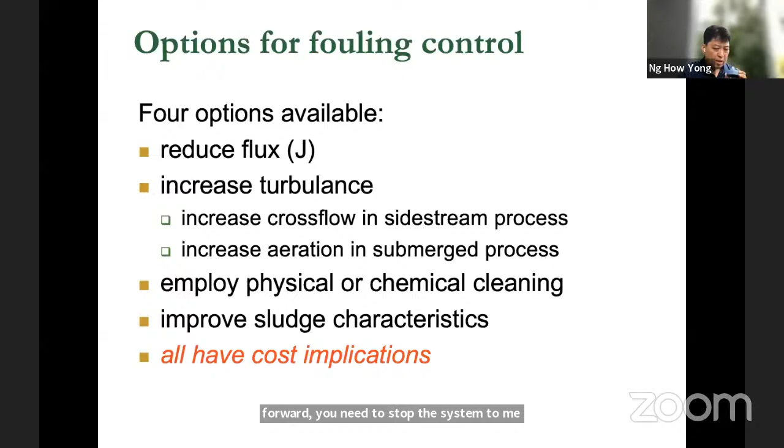That's one way. Next is to increase turbulence, increase crossflow in the side stream, increase aeration. Okay, that is during the operation.

But then you can also have physical cleaning or chemical cleaning. That's when you foul very badly. Or you try to operate such that you improve the sludge characteristic, make sure the sludge is not so sticky. Okay, so all of these have cost implications.

So what is called critical flux? Critical flux concept means that the flux whereby you run above that, your membrane fouls very fast. That's called critical flux. Okay, so you try to run your system below your critical flux.

Okay, so membrane will foul. There's reversible or irreversible fouling. So if it is physical, you try to clean it by membrane fouling removal. Okay, and then...

Possibly by biological cleaning, then that is something else we will talk about. Okay, and this biological cleaning includes this thing called quorum quenching. Okay, it means cell-to-cell communication, so that you can delay membrane fouling.

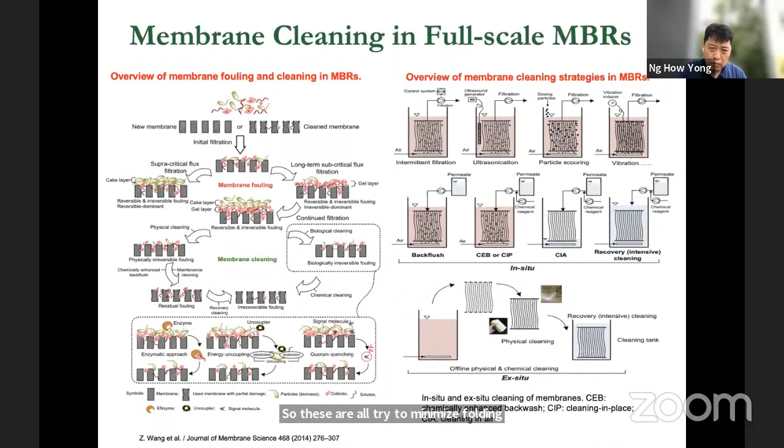So how can we control? Okay, so these are the whole membrane system. All right, so what's your rate coming out? Your flux will impact membrane fouling.

Bioreactor, how to make the cell less sticky in nature so that it attaches to the membrane surface slower. All right, and then air scouring. So these are different ways. So maybe I'm going to skip this one.

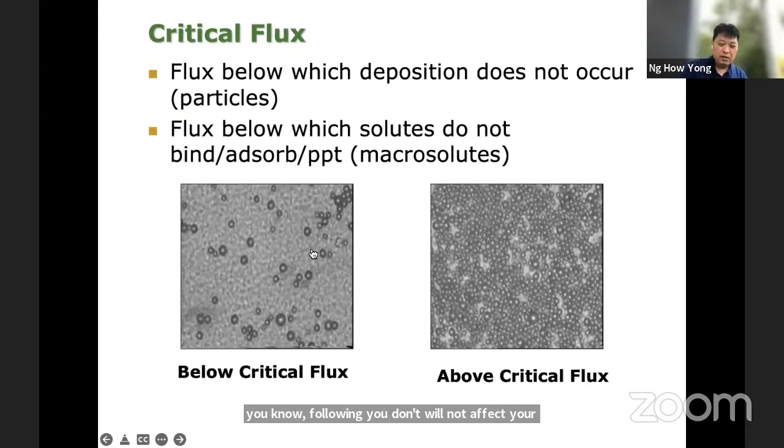So critical flux, okay, critical flux means the flux whereby if you run at a flux higher than the critical flux, then the foulant attaches very fast. So this is below critical flux, then the particle or solute, your foulant, will not attach to the membrane surface so fast. All right, so that's the critical flux concept.

All right, so critical flux increases as bubbling increases. Okay, so if your bubbling increases, your critical flux will increase. So to reduce fouling, you operate at a flux lesser than the critical flux.

So lower flux means you get a capital penalty, or high flux means an energy penalty. So it's pro and con. If you run at low flux, you need more membrane area, so your capital cost will be high.

If you run at higher flux, your membrane will foul faster. Your energy usage will be higher because you need to run at high TMP, right? And then more frequent cleaning, so operation cost will increase. So it is a trade-off, okay.

So similarities and differences with activated sludge: biological kinetics are very similar, slightly different in the sense that because you run your system at very high solid retention time, your bacteria is more in the endogenous respiration stage. Yeah, so their growth rate is lower.

Okay, and the differences are: the efficiency of removal and footprint will be lower, effluent quality better. Okay, so treated effluent is particle free, a compact process with smaller footprint, and odor containment, you can control it.

Processing advantages: microorganisms are not selected for floc formation, meaning any floc, because your bacterial membrane can remove very well. But of course, if you get bulking-forming bacteria in the MBR, it can still produce good effluent quality, but the only issue is the membrane will foul faster.

Okay, colloids and macromolecules can be retained for improved bioactivation. Other benefits: eliminate the problems associated with bulking sludge, allow increased biomass concentration, increased loading rate, and promote higher reaction rate, increase in temperature and intracellular enzyme kinetic extent.

Disadvantages: fouling is an issue. Energy usage may be higher than conventional because of aeration and scouring. Occasionally chemical cleaning requires robust membranes. Small to moderate scale operation has been established.

There are large plants, okay? Nowadays you've got many large plants. Sludge produced tends to be more difficult to dewater because your sludge is older.

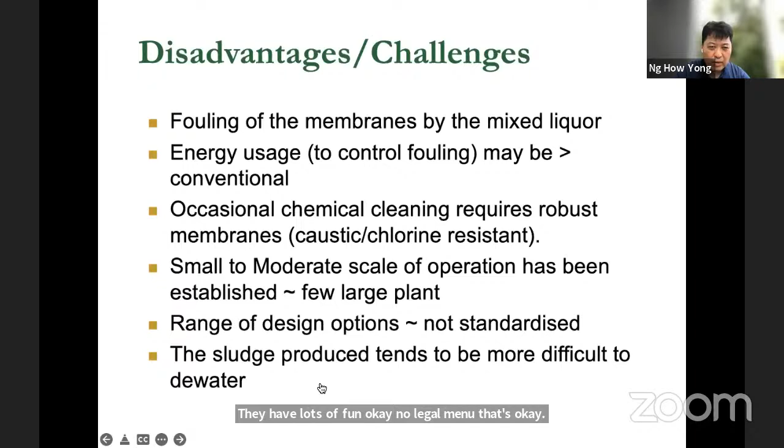Membrane is prone to blockage, biofouling, and scaling. Blockage is caused by hair and fiber blocking the membrane inlet. Biofouling is caused by residual biodegradable organic substances. Scaling due to inorganic substances can happen if your calcium and magnesium are too high.

High cost of membrane replacement. Hollow fiber used in MBR breaks and is only repaired after time-consuming inspection. So these are some operating protocols, I won't go through that.

And then cleaning: you can use sodium hypochlorite, sometimes citric acid. Sodium hypochlorite is the most common, and sometimes they also use oxalic acid for chemical cleaning.

Now, in terms of biological removal, I'll just cover a little bit. First is ammonia nitrogen removal. Most of the time, wastewater is in the ammonia form. Nitrifiers will convert it to nitrate, and then denitrification converts it to nitrogen gas, N2.

Nitrification will occur simultaneously in the aeration tank because oxygen is present, and there's always nitrobacter and nitrosomonas present, converting to nitrate. But nitrifiers grow very slowly, therefore sludge age should be maintained greater than 3.5 days. Once you operate with solid retention time of 5 days and above, you will have nitrifiers, so nitrification is usually not a problem.

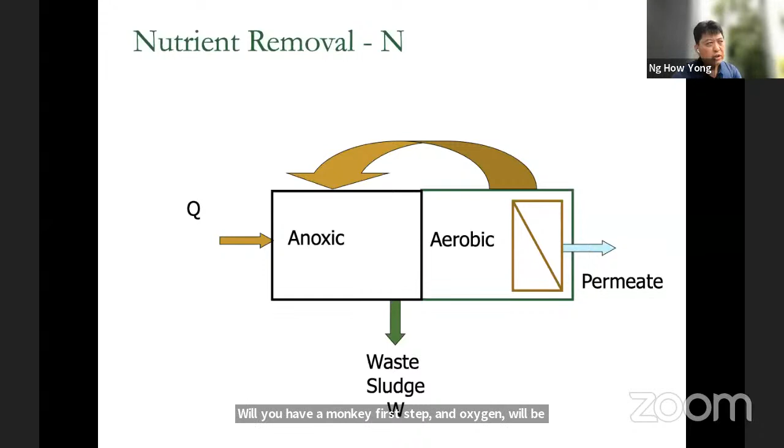So in order to enhance nitrogen removal, you can have multiple stages like anoxic-aerobic, anoxic-aerobic, anoxic-aerobic, and finally the membrane tank. So you have multiple steps of anoxic and aerobic combination, then you can reduce the nitrate concentration in the final tank. So this is how nitrate removal is achieved.

So in the MBR, we have an anoxic tank, aerobic tank, then finally a membrane tank. This is how nitrogen removal is achieved, and this is how the full-scale plant can look like: anoxic tank, aerobic tank, then membrane tank.

And then you have internal recycle, because your membrane tank usually has very high DO. So they bring this high DO to the front of the aerobic zone. Then after the DO has reduced, they take this stream, low in DO, to the anoxic zone. That is how denitrification is achieved effectively.

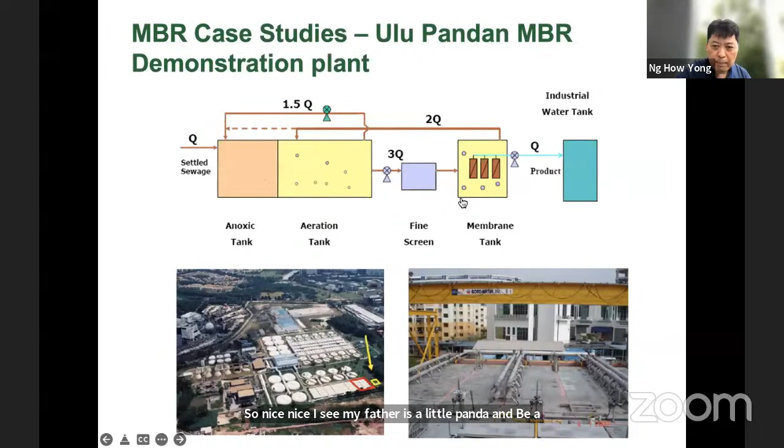So this is in Singapore, there is the Ulu Pandan MBR demonstration plant. You've got anoxic, aeration tank, followed by membrane tank. Then the fine screen is after the aeration tank. So you can see that this has a flow of about 23,000 meter cube per day.

Influent BOD about 138, COD about 292, total Kjeldahl nitrogen 48, ammonia about 32. This is the Zenon hollow fiber. Operation condition: sludge age 8 to 10 days, HRT 6 hours.

And then the final effluent quality, the product water quality: you can see turbidity is 0.02 NTU, ammonia 0.2, TOC 4.8, nitrate 6.3, total phosphorus 3.3.

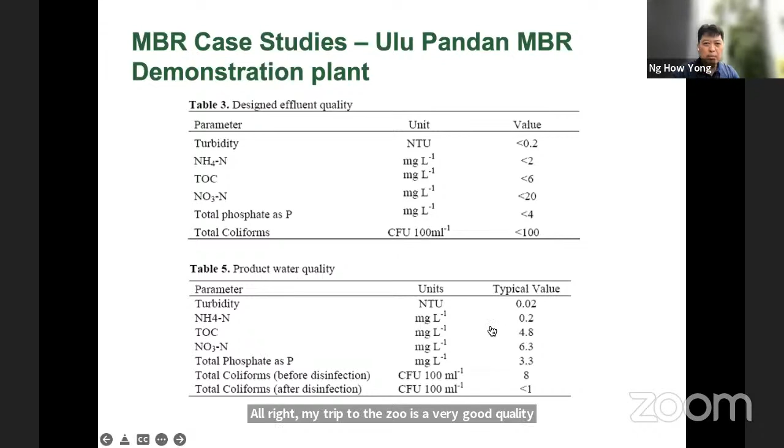So it's a very good quality water, suitable for NEWater production. In terms of energy cost, the power consumption is about 0.55 kilowatt hour per meter cube, with continuous aeration. Right now, with intermittent aeration, you can go down to 0.3 kilowatt hour per meter cube. Membrane air scouring is the majority of the energy consumption.

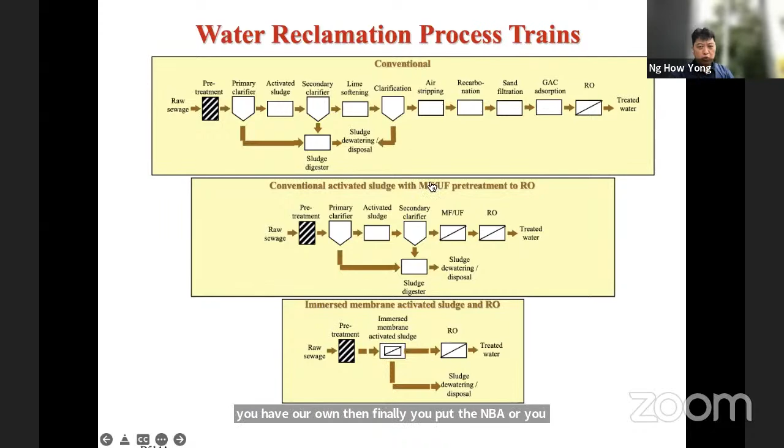So, the water reclamation process train. You can see this is a conventional system. Now with MF pre-treatment, MF, UF, RO, then finally you put the MBR, you can simplify your treatment train. Okay, that's how the system looks like.

Looking at short SRT, and then using ceramic, running at high flux. These are new approaches, using ceramic membranes for industrial applications.

Another interesting topic is using membranes under anaerobic conditions. This produces high effluent quality, suspended solids free, but ammonia is still very high. So you produce biogas for energy production.

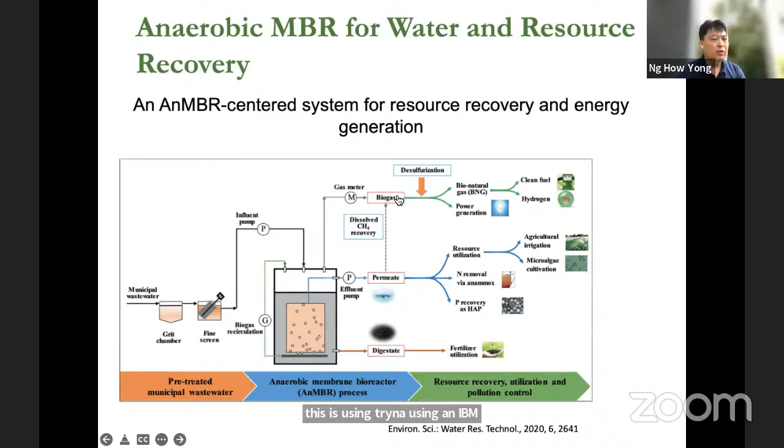Membrane fouling control: of course, R&D looks at pre-treatment, surface modification, making it more hydrophilic, more oxidative treatment, and chemical cleaning to remove foulants.

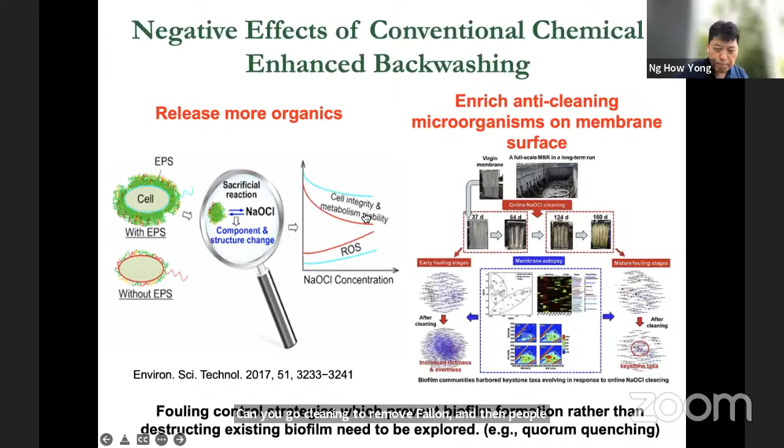Then people look at the effect of chemicals and hump-backed curves, how to minimize the impact. Recently we also studied using quorum quenching, cell-to-cell communication, telling the bacteria not to attach on the surface, because bacteria produce organic signaling molecules to attach to surfaces. But now you introduce another microbe to consume this signaling molecule, and you can reduce membrane fouling.

So this covers MBR and a little bit on nitrogen removal and biogas recovery. That's the MBR overview. All right, let's see if there are any questions from the students.

Okay, Professor Ng, so yeah, for the question, if you have any question regarding the membrane - it's relatively new technology in Indonesia, despite already being well known. But I have a question, Professor Ng, because recently, mostly in Indonesia, the biological treatment process just uses lagoons, and some of them use extended aeration. And recently, to increase the MLSS, our government and some consultants came and added biofilm carriers using media, like kaldnes, to increase the MLSS.